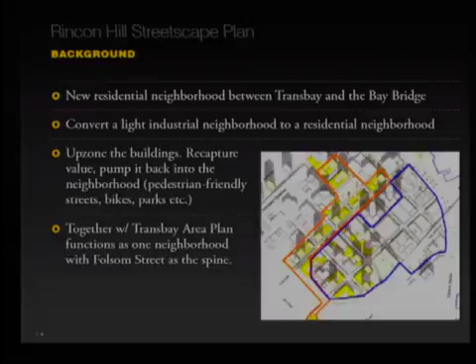These are the streets that are in Rincon. The red dashed lines are actually in the Transbay area. The colors are a little different on screen, but this purple line is Harrison Street. North, Market Street, is toward the top of the drawing. Folsom Street is going to be redone by the redevelopment agency, or by the Office of Community Infrastructure and Investment, the entity formerly known as the redevelopment agency.

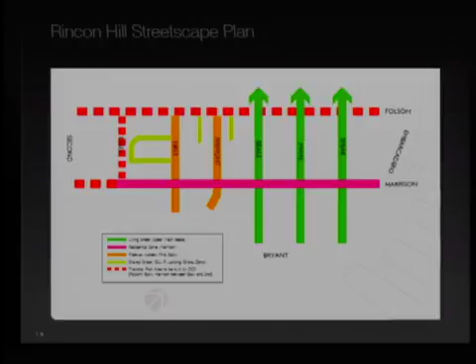The living streets, Main, Beale, and Spear, are those green streets. They have very generous sidewalks, and part of the intent is to show that they can double as open space. Fremont and First Streets access the freeway, so they're more a balance between pedestrians and automobile traffic.

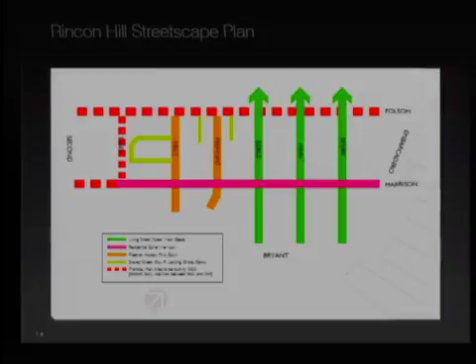Some of the alleys, the light green streets, are more residential and open space in character. So just to walk you briefly through, you can see Harrison Street's typical features in the plan, including these very generous bulb-outs. On the living streets, where you have a 30-foot sidewalk, those bulb-outs almost become like a pedestrian plaza.

Here's an example of some of the living streets, intended to function as open space because there wasn't a lot of open space in the neighborhood. These wide sidewalks enable us to create open space pods, generous little nooks programmed for activities like sitting and walking your dog.

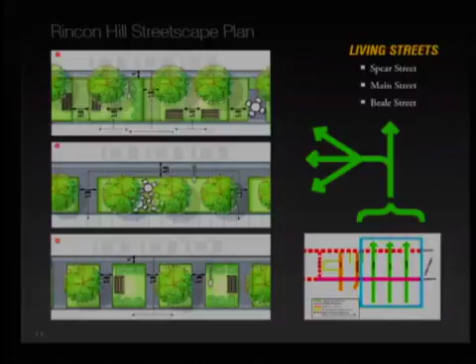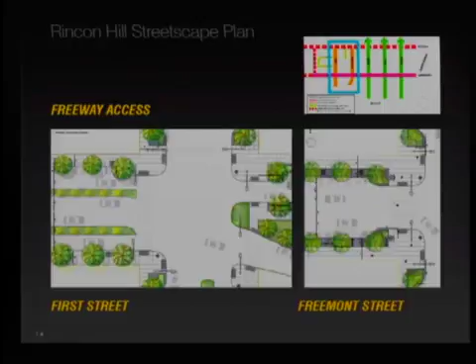The freeway access streets, Fremont and First Street, are similar to the Better Streets Plan standards, our basic standards for a walkable space, except the bulb-outs are more generous. Then Guy Place and Lansing Street are some of the residential alleys, with Lansing Street moving forward as a shared street.

Since the plan was initially adopted, there used to be a bus line on Harrison Street, which has sort of been removed. It was using the parking lane as a transit-only lane during the PM peak. So MTA has taken away that bus line, and we've added bulb outs to the north side. That's the tweak that the MTA board recently approved.

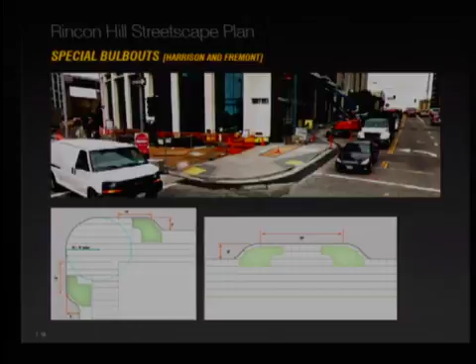The bulb outs themselves are bigger than the standard city bulb out, and they also have space for greenery, bike racks, or some street furniture. The plan gets into some details around planting materials, street furniture, and street trees that are called out specifically for different streets.

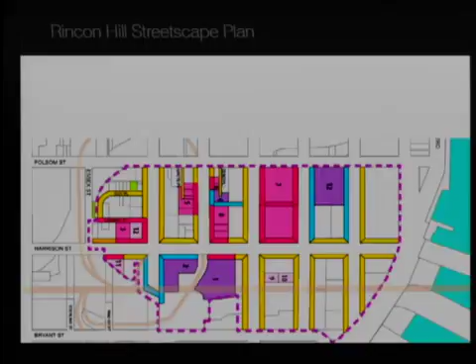So it's really important that we adopt this plan, because it gives us an important tool to work with developers to make sure we get the public realm that they're required to do.

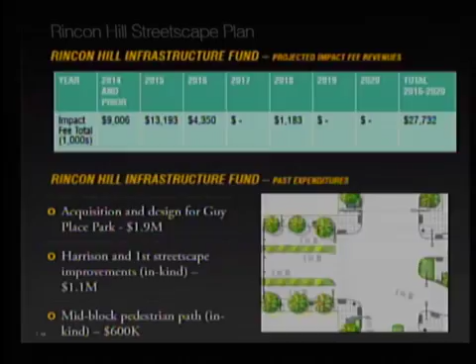And then just briefly, there are impact fees that fund a lot of this infrastructure, which goes through the IPIC process, done through the city's capital planning process. Annually, it's updated based on the projected revenues. So here's the funds that we have in the process right now.

Some of the past funded projects were Guy Place Park. We're going to be funding Harrison Street through this project, and a mid-block pedestrian pathway. Here's a photo of Guy Place Park, and some of the streets that have already been funded through the impact fees.

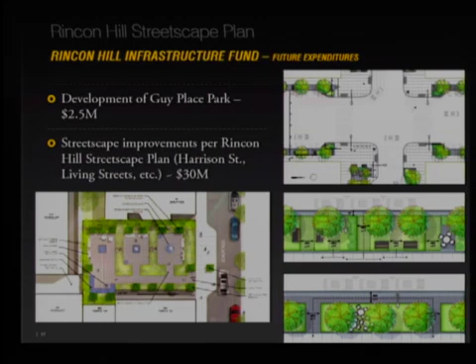Just a sneak peek, Folsom Street is not in the Rincon Hill plan area, but it is next door. And like I was saying, we work very closely, so I just want to give you a sneak peek of what's coming to Folsom Street.

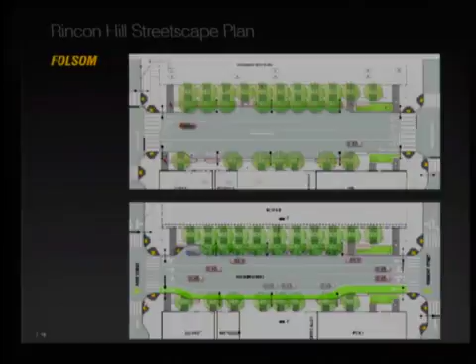Folsom Street was initially conceived as a 4-lane street, but because of Vision Zero and some of those goals, we've been able to convert it to a cycle track. So you can see initially it was going to become a 3-lane street with a cycle track, and now the new design calls for a 2-lane street and a cycle track, which is going to make a much safer pedestrian environment.

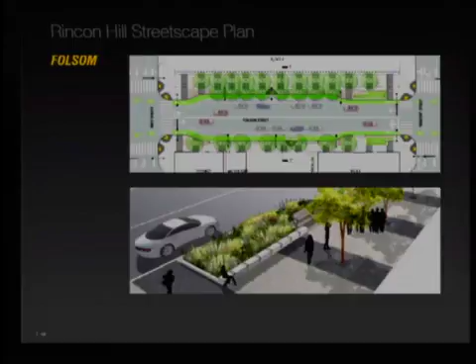It's going to be a really high-quality space, and we've been working closely with our colleagues at OCII to deliver that. And that is the summary of what's in the plan. So if you have any questions, I just want to thank you for your consideration of this.

Thank you. Supervisor Kim? Thank you for the presentation, and I would also love to get an electronic copy of it. I just had two questions.

One was on what you had brought up with the additional bulb outs on Harrison Street, which I'm very excited about with the rerouting of the 12 Folsom. This is a question I had reading the planning memo. I know that Folsom going eastbound currently turns and goes towards Chinatown. I guess I'm curious about the change from Harrison Street. I didn't understand what the exact change was. Oh yeah, can I get the computer back?

So to answer your first question about the bulbs: basically the city has impact fee money rolling in, and we've prioritized Harrison Street based on community feedback as the highest priority. Part of that is because, as you can see in the upper right, it touches all the streets in the neighborhood — it's an important circulation street. It's also a Vision Zero street, which we know is important. And then the other thing is, we're going to build Harrison Street and the bulb outs to the future dimensions.

For example, you can see an image here of Harrison and Spear, and you'll notice on the left side of the image there's a much wider sidewalk — the right side has a 15-foot sidewalk, the left side has like a 30-foot sidewalk. So when we build the bulb out, we'll build the curb line to the 30-foot sidewalk and then return it to what it is now.

And so in doing that, we can reduce the cost of these other streets a lot, but also really close up these intersections and make them much safer for pedestrians.

To answer your other question, the MTA used to run a bus on Harrison Street and Folsom. The bus ran as a couplet, one eastbound, one westbound. Because of the freeway, there was a PM peak transit-only lane. Afternoon traffic getting onto the Bay Bridge would slow down the bus, so the parking would disappear and there was a bus-only lane there. MTA then removed the bus during budget cuts.

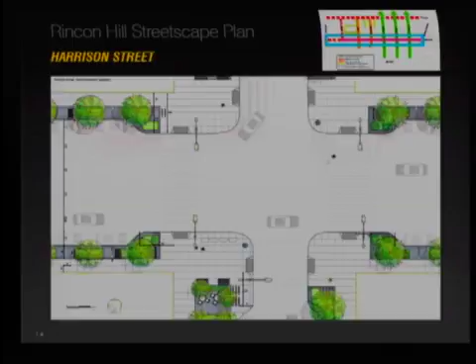They're now adding the bus back, and we've worked closely with them in designing this to make sure the bulbs don't interfere with future transit operations. Because there was a bus-only lane there, we couldn't have bulb-outs when the plan was originally written, since the bus would crash into the bulb-out. But now that the bus has been removed from that stretch of Harrison, we were able to add bulb-outs to the north side of the street over here.

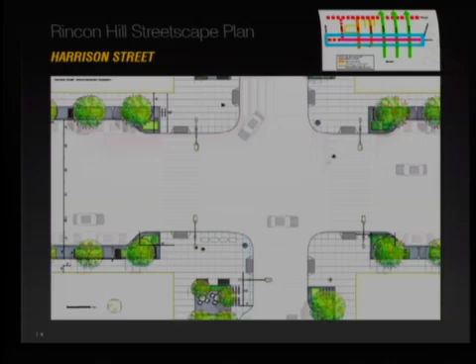And this is just east of 2nd Street, right? Yes. I only ask because our residents have a legitimate concern they've expressed to SFMTA, which is that none of the east-west buses in south of Market go past 2nd Street. They've been pushing MTA to push the buses further east to meet the needs of the Rincon Hill neighbors, since there aren't really any buses in that area.

So I'm curious whether the bulb-outs will get in the way of that future advocacy work. Maybe I should have articulated it better: MTA took away the bus during budget cuts, and the neighbors are understandably upset because there's no transit while we're adding all this dense housing. So we've worked with them on where the new bus is going to go, and they're putting a bus back. We've made sure the bulbs we're putting in here will work with the bus.

Part of the answer is that Folsom Street is becoming two-way, and it also has a lot of housing on it, especially affordable housing, which is a more transit-dependent community. It's also a flatter street, so it makes more sense for the bus to be two-way on Folsom Street.

Right, so if buses can go two-way on Folsom Street, which we're still working through in the Central SoMa plan to see if we can fit a two-way Folsom Street, since there are also conversations about it being a Howard and Folsom Street one-way diet as well, I think that would rectify or take care of that need.

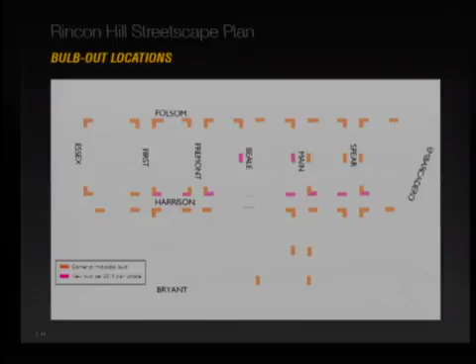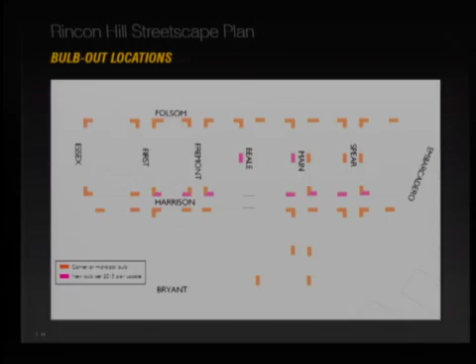I know the neighborhood would like to see that occur as soon as possible. I want to reiterate my support for utilizing the Infrastructure Financing District, which the Board of Supervisors approved back in 2011, to ensure we're able to use some of that tax increment to help fund gaps for the open space and streetscaping work this growing neighborhood really needs. My second question is a small one.

It was actually asked at the last community meeting at South Beach Harbor. There was a concern about placing trees between parking spots as a way of widening sidewalks on Guy Place. If I could get the laptop again, it might be helpful.

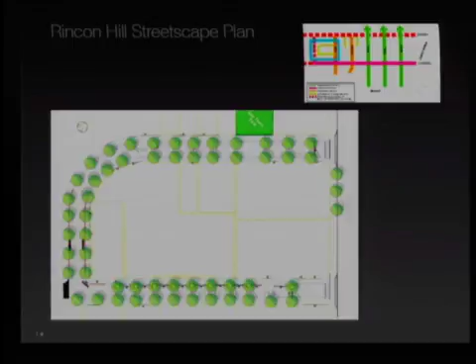The concern was that the city has never done this before. I believe we have, but I wanted to clarify that. The city has done this before — one example is Chenery Street in Glen Park, which has trees in the parking lane. This image is from the original plan, written before the Better Streets plan, so there was no shared street then. When we updated it, we added a shared street, but the original plan always called for trees in the parking lane; we just lifted up the curb when we updated it. There's precedent in Glen Park, and also in the Better Streets plan itself, adopted by the board around 2007, which has a whole typology calling for street trees in the parking lane as part of the city's toolkit for designing streets.

On an aesthetic level, I really like it. The concern raised was that the trees would get hit a lot, and how we would protect them with cars parking in between. The second concern, which I don't have the answer to, was whether the roots would come up above the sidewalk and impact the parking. So let me try to take a stab at those two.

Between the cars, you can see this bar — that's a wheel stop. And on the other side, there's a little square thing, which is a bollard that protects the trees. The parking spaces are also a little more generous than a normal parking space, so cars can get in and out.

The final important thing about Lansing Street is that when the 45 Lansing project, on this parcel off the bottom of the map, went through the Planning Commission, because it's a big skyscraper on a postage stamp parcel, they couldn't meet their open space requirements. So the Planning Commission required them, in their conditions of approval, to build Lansing Street and maintain it in perpetuity. So if a car bumps into a tree and hurts it, or roots break up the sidewalk, the 45 Lansing development is responsible for maintenance — removing that responsibility from the other property owners on Lansing Street, who they're assuming it from in perpetuity.

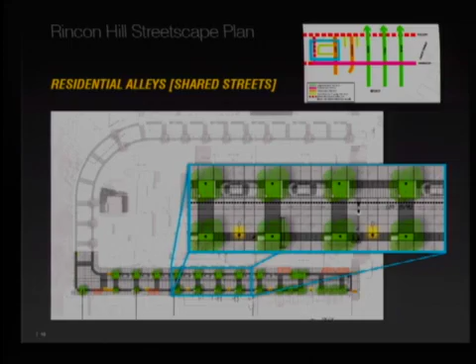Thank you. I'd like to now go to public comment. Public comment is open at this time. If there's any member of the public that'd like to speak on this item, please come forward. Seeing none, public comment is closed.

Supervisor Kim, do you have any last remarks? Yeah, I just want to thank the planning department for all of their work on this. This is a neighborhood that will support 10,000 residents, so it's really important that we create a complete neighborhood. We can't wait soon enough for these improvements to go in, both for open space and the streetscaping, so that we can encourage our residents to walk safely and build this healthy neighborhood that we want to see. So thank you for that.

I know that there were a lot of delays along the plan, partially due to the recession over the last couple of years, but it is really amazing to see all the development and construction occurring in this neighborhood now. Very painful for the existing residents, but in the long term, I really hope that we're able to build this great neighborhood. So I ask for your support, and I'll make a motion to move forward item number 1 and number 2 with positive recommendation.

Motion made by Supervisor Kim. Could we do a roll call vote? Thank you.

A roll call vote on item number 1: Supervisor Kim, aye. Supervisor Wiener is absent. Supervisor Cohen, aye. You have 2 ayes. This motion passes with positive recommendation.

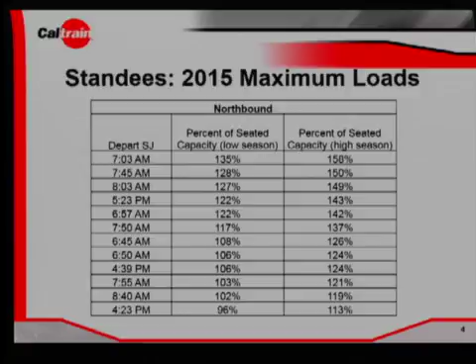You can see that we have a variety of different customers riding the system, from people bringing on bikes, to people going to and from work, and our ADA passengers. For the average rider, they are on the Caltrain system between 20 and 28 miles, and for between 30 and 50 minutes. As you can see, when this compares to other systems in the Bay Area — BART, Muni, and VTA — their passengers are on those systems for less time than they are for Caltrain.

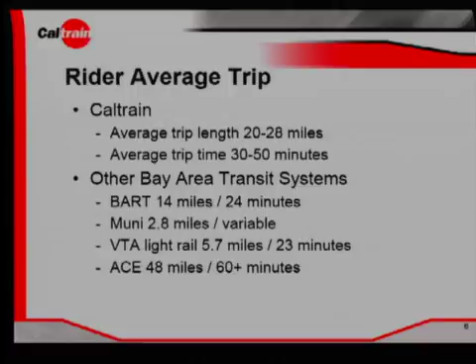For ACE, a commuter rail system, you can see they're even more. So Caltrain right now is a little bit in the middle for what riders are experiencing and how long they're on the system. But when we look at the future for electrification, we have to keep in mind: will the system look a little bit more like BART, Muni, and VTA, or is it going to look more like ACE and Capitol Corridor and other commuter rails? So we have to balance that and understand the needs of our riders using our system.

Our riders have told us a lot about their capacity wants and desires, and that Caltrain needs to expand to be able to use the system efficiently. But we've also heard from businesses as well. The corridor that Caltrain runs on, between San Francisco and San Jose, has an incredible amount of economic support and vitality to the state: 14% of California's GDP, 52% of the patents, and 25% of California state revenue come from this corridor.

And because this corridor is so important for so many businesses, they created the Caltrain Commuter Coalition, which was formed last year.

The point of this coalition is really to advocate for Caltrain modernizing quicker, increasing that capacity, and working on the whole 101 corridor to see what can be done to alleviate congestion.

That will make this a viable and sustainable economic environment. You can see a couple unique facts about Caltrain riders: 75% of the riders use the system to commute to work, and 60% are choice riders, meaning they have access to a car but are choosing to ride Caltrain instead of clogging 101 and other arteries, using it as a good alternative to get to and from work.

So what Caltrain's been doing to address their needs is, first of all, do everything we can do now. The first step was we bought used diesel trains—you can see in the bottom left-hand corner a picture of those trains. We put them out in our system without even painting them because we knew we needed to get them out there quickly. Those are in operation now, helping to alleviate some of the congestion that's on there today.

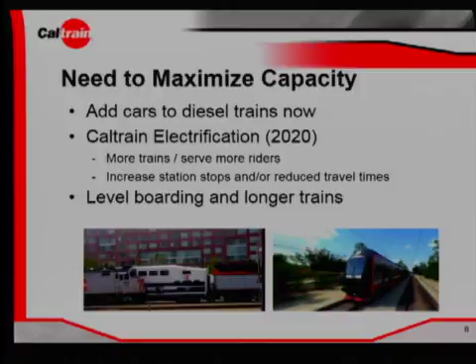Now, when we talk about electrification—and I can cover this on this slide and in a couple slides further, I'll get into more details on those elements—with electrification we will be able to add more trains per hour per direction. So not only will they be 6-car trains, but we only have 5 in the peak hour today; with electrification we'll be able to have 6. So for standees, seats, and bikes, that will increase dramatically on the system. The exact ratio of seats to standees to bikes—we have a whole presentation on the staff recommendation for those elements, and I can talk about those a bit, but in broad terms, those are the key elements of how you get more capacity with electrification.

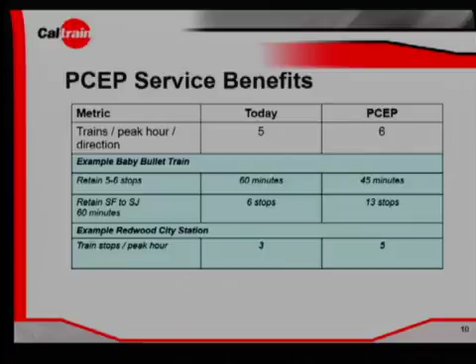So if you're standing at a station like Redwood City and you get 3 trains coming through today, with the electrified system, you could have 5. That'll mean a lot to you—you'll have more choices and be able to get on and off the system quicker. So it's not just one more train per hour, but it really is the performance difference that lets us change the schedule and make different schedules for people, hopefully making it more convenient.

With this, I'll run through a couple slides on where we've been with the details of the electrification project, and then I'll turn it over to Dave to talk about how our thought process has been modified based on stakeholder feedback, and finish with what our staff recommendations are going forward.

So the first one is just a recap of where we are. We spent 2 years working on the environmental process for this project, and we got board certification at the beginning of 2015. We've issued a design-build RFP contract, which is the contract for people building the poles and wires to electrify the system, and we expect the board to award it in the fall of this year. On the EMU side—the electric trains—we want the Caltrain board to issue an RFP in July, next month, so we're able to have a contract award by the end of this year and keep in place the time frame of having electrified service by 2020.

These are really important milestones to meet in order for us to get that 2020 date, which is so important to our riders, business communities, and our board members.

It's important for us to talk about our original plan because we want to be very transparent about what we were doing and where we're now modifying. We've been getting a lot of stakeholder feedback as we've gone around to public meetings over the last couple of months, and we'll continue to do it this month to make sure we are on the right path, and if we're not, that we're hearing from our stakeholders.

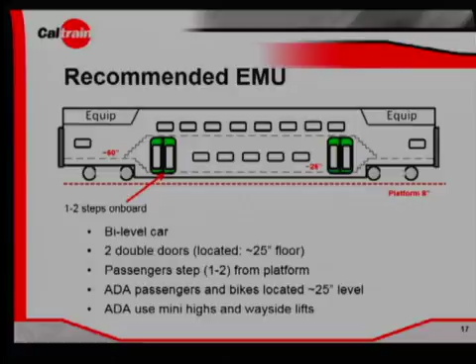And this is what the vehicle would look like. It would serve our corridor today. It would be bi-level, with several different internal levels, and the doors are at that roughly 25-inch level height. If you're an ADA passenger or carrying a bike on board, you take those couple steps in, and then you'd be at that bottom level.

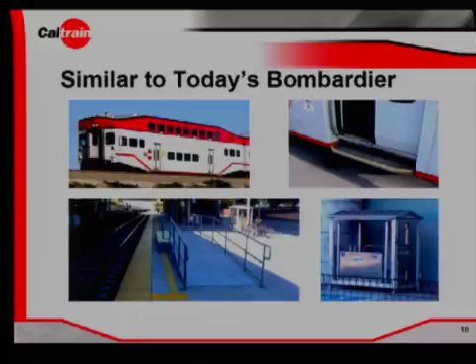Now, as I've mentioned, future level boarding is very important to Caltrain. It's important for safety, operational efficiencies, passenger convenience, and ADA elements. This is something we do want in the future, and depending on which car we get, that future level boarding height will need to meet that.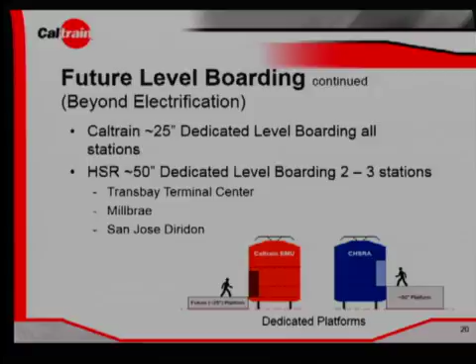So in our original thinking, for level boarding, Caltrain would have level boarding at the 25-inch level, and high-speed rail would also have level boarding, but at the 50-inch level. So we'd both have level boarding, and at the 2 to 3 stations shared by high-speed rail, there'd be dedicated platforms.

Now, with any level boarding height, there are challenges. There's a lengthy construction period—when you're having revenue service, you're going to have to build those platforms, and Caltrain has 27 of them. There's also a California waiver that would be needed because we have freight on the corridor. We also have several different tenants that board the corridor at different heights—ACE, Capitol Corridor, and Amtrak all have different heights than Caltrain today, potentially Caltrain in the future, and high-speed rail.

For station area impacts, we have 7 historic stations. There are different ramps and very different site-specific needs that all have to be taken into consideration for any level boarding height.

So with that, I'll turn it over to Dave to walk through our thought process of how that's been modified for our thinking, and then I'll come back for the staff recommendation going forward.

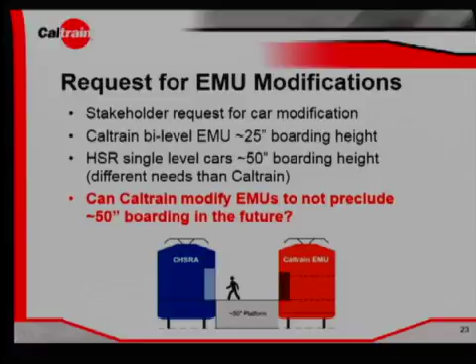As we've gone forward in conversations with each of the car builders, we're trying to take into account what the requests have been from many of the stakeholders. As Casey said a few minutes ago, the original process was for Caltrain to have a 25-inch boarding height and high-speed rail to have 50-inch. So what was put in front of us was: what could we do to get to that common boarding height of 50 inches? How could we modify the EMUs we're about to purchase so that we could do that and have level boarding in the future?

We started a 6-month process in conjunction with high-speed rail, and Ben Tripousis sends his apologies today—he's in Sacramento and couldn't be here—but I want to assure you we've been through this lockstep with high-speed rail. We interviewed car builders to find out what they had and what their capabilities were. We did a technical analysis to make sure there weren't any critical flaws in anything we were looking at. And then on the back end, we also went through to find out what the constraints or issues would be on the operational side, because this is going to have a long-term effect over a 30-year plus time frame for each vehicle.

The car builders that participated—there were 7 of them—proposed different options. One was to add additional doors at the upper and lower level, and the other was to use something called traps, which would not result in a loss of seats but would limit the number of doors available for passengers to board and exit the vehicles. What is a trap?

I'm sorry. A trap is... Got one more picture?

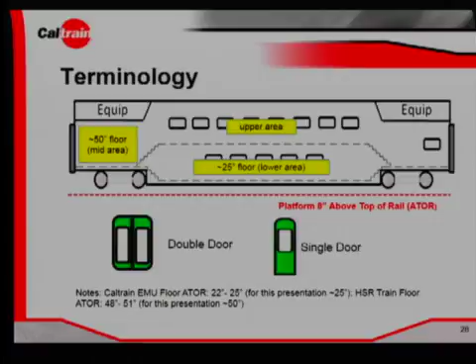On the lower left is a double door, similar to what you saw earlier in the Bombardier fleet. On the lower right is the single door, and that's going to be associated with the traps when I get to that piece.

As we look at the 2020 timeframe, it's going to be a time when we have mixed fleets. We'll have the EMUs running, but we'll still only replace 75% of the vehicles under this program, so we will continue to use the diesel fleet out into the future.

If I look specifically at modification A, this was the first one that put 2 sets of doors - 2 doors at the lower level, which was the original way we had envisioned and planned for the vehicles, and then 2 at the upper level. What would occur is those 2 upper level doors would be installed at the time the vehicle was manufactured. They would then be closed and not utilized until the platforms were at the 50-inch level.

That would occur once the first platform went to 50 inches, because at that point there would no longer be access from those lower level doors. This gives us better ease of being able to get passengers and bikes on and off. We have to figure out where the ADA facilities are, whether on the upper or lower level, and that will make a difference as we move forward into the upper level platforms.

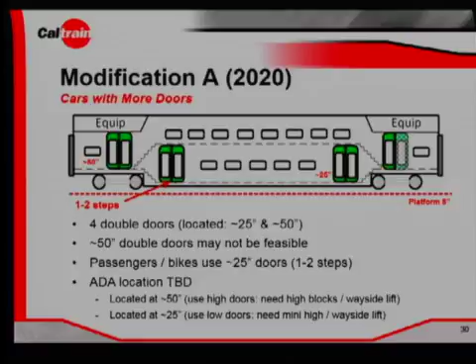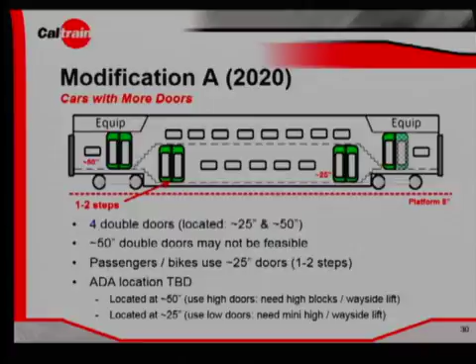To access those, we would use a combination. If it's the 25-inch platform, the mini-highs we currently have at the stations could be used, or the lifts. If we went to the 50-inch level before all the platforms were at that height, we would heighten those blocks, which we now call maxi highs, and also use the wayside lifts.

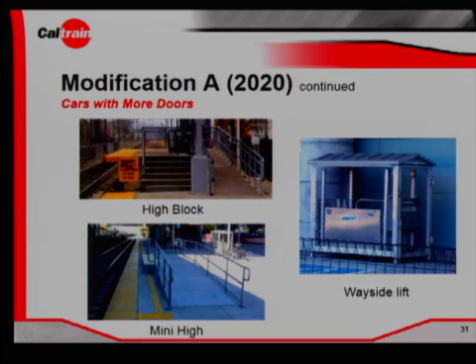This gives you an idea of what each one looks like. On the top left is a picture from the East Coast, a high block that gives you boarding height at the 50-inch level. The lower left shows the existing mini-high blocks currently out on the system. In some cases, if we went to those higher blocks because of platform constraints, we may be forced to remove some mini-highs and use what's on the right, the lifts. We have those at some stations now, and depending on configuration, we may have to use them at more.

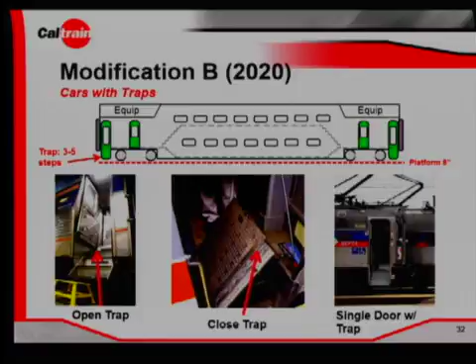In modification B, which takes us to the point of going with the traps, this is really a description of what I showed on the previous slide. It involves single doors, with traps and steps. This is maintenance intensive — some manufacturers have automatic traps, some have manual traps. The ADA location at this point would be at the 50-inch level, and then you have a series of steps going up and then down again to reach the lower level, where the bicycle parking area would be.

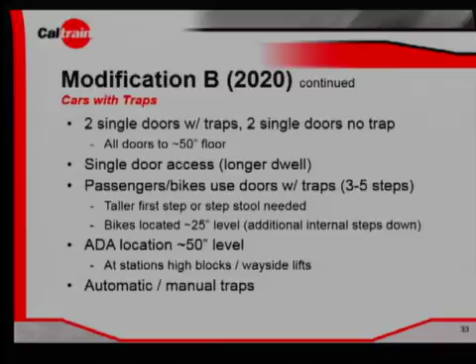By having single doors instead of double doors, it also causes an increase in dwell time. I don't have an exact number for what that would be — it's basically about half of the door leaves we currently have. I wouldn't say it's a doubling of the dwell time, but it is an increase.

When we look to the future at what blended service would be with high-speed rail, with modifications to the stations — in this case scenario 1 — we have 2 to 3 stations with that common platform height, the 50-inch for high-speed rail and Caltrain, and on the right, the 25-inch high platform only at the Caltrain stations. So this scenario does not have all platforms raised to the 50-inch height.

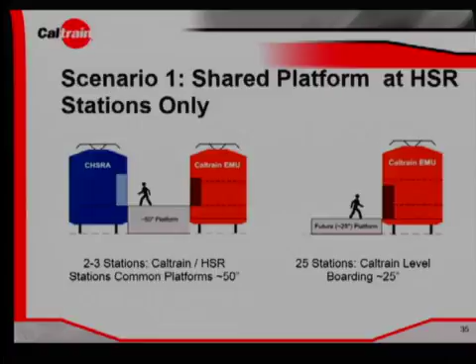If you go to scenario 2, this is with common height 50-inch platforms for both high-speed rail and Caltrain at all of the stations on the peninsula.

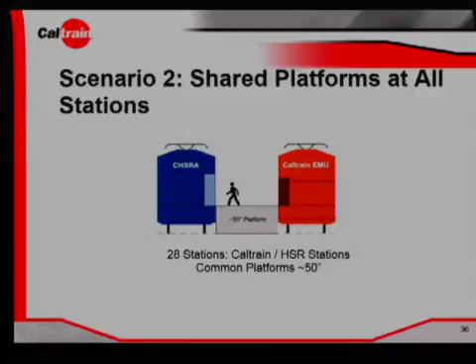Moving to the future, what that means for modification A is you can see that if we stay with 2 or 3 of the stations at the higher platform level, both the upper and lower doors would have to remain open to serve both the 25-inch height and the 50-inch height platforms. In scenario 2, shown at the bottom, if all platforms were at the 50-inch height with common boarding, we would be able to close those 2 lower doors, basically regaining seats.

I have a couple questions for you, Luis, and I'm not sure if I should direct it towards you or towards Casey. I wanted to know if Caltrain had the money for level boarding at any height. No, there is currently nothing in the budget right now for any platform modifications, and there is nothing that was cleared in the environmental process for any changes to the platforms.

As Casey said a few minutes ago, there are also a series of historic stations on the peninsula that could be challenging when it comes to making those platform changes.

I also wanted to know if the disability community was consulted on some of these plans, and with regards to the platform, if they have a preference or a comfort level when it comes to getting onto these trains.

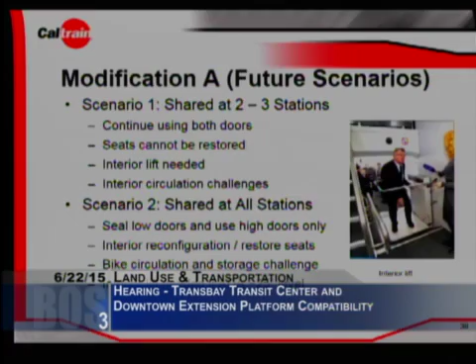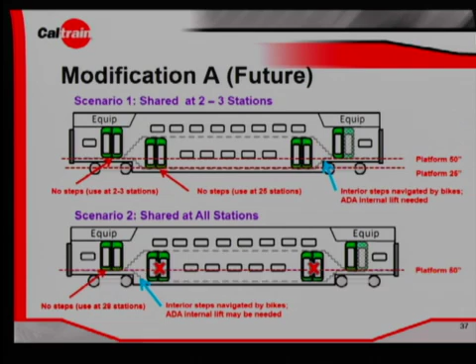So that would allow, in modification, staying with this for just a second, what this does with all platforms shared is you close the lower doors, which regains the seats. That shows you what that modification in scenario 1 does, and it's basically what I described in the previous slide.

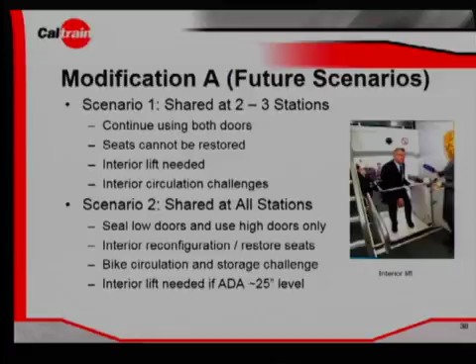Modification B goes back to the vehicles with the traps. At the point in time that you only had 2 or 3 stations that were at the upper level, you would continue to use the traps at the point that you could get access from either the 25-inch or the 50-inch platform.

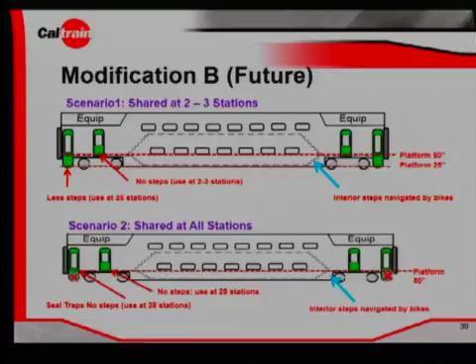So you would have both of those sets of doors with the trap still active. If you went to the second scenario, which was shared boarding at the 50-inch level with the high-speed rail locations, then you would close off the bottom of those traps, seal the doors, so that you would have 2 single-leaf doors at each end of the car for entrance and exit for any of the customers.

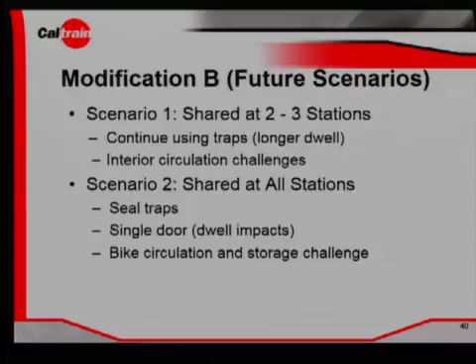That's a descriptor of what would occur as you went through that process to seal the traps, and some of the pieces in terms of what the impacts are on dwell time, and challenges for passenger and bike circulation. Each one of these scenarios has its own pluses and minuses.

Potential path forward, I'll let Casey come back up unless you have any other questions at this point. We have no questions at this time. Thank you.

I'll go through the next couple slides on a potential path forward, and then we have been meeting with lots of groups, including ADA groups, so I'm happy to talk about some of that feedback we received.

So for the potential path forward, we have to keep in mind the framework, which is making this all a little bit more complicated than I think anyone wants. But the blended system is not yet defined. There needs to be more community planning, more environmental evaluation to figure out exactly what it will look and feel like in the future. Right now, we have a conceptual idea of what the blended system is.

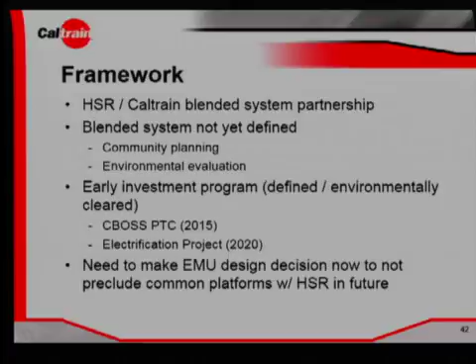But what we do have defined is the Early Investment Program, actually called the High-Speed Rail Early Investment Program. That's the CBOSS PTC system, or Advanced Signal System, and the electrification project. That is environmentally cleared, and we do have it defined. What we have been asked to do is make a decision on our EMUs, our electric trains, so that it will not preclude a future common platform with high-speed rail. So we are trying not to preclude a future that's not quite defined.

So what staff is recommending is that we choose the car with more doors as the option. There are some challenges with that option. There is a seat loss when you have both sets of doors open, and some passenger circulation issues inside.

As you saw, if you're a bike passenger or a passenger bringing a bike on board, you would board but then need to transition down steps internally. So there's some challenges there, but we think there's some short-term solutions that we can implement.

First, we would ask the car builders to design this car with 2 sets of doors. We would keep the high doors sealed and only use the low doors initially. It would be similar to what the EMUs would originally look and feel like we'd proposed, but we'd have that flexibility later to open them when we have further definition on the blended system.

And we look at whether it makes sense to have some car interior reconfigurations. At this point, we are asking High Speed Rail to fund those modifications so that we make sure we have this option in place to meet the blended system's different possible futures.

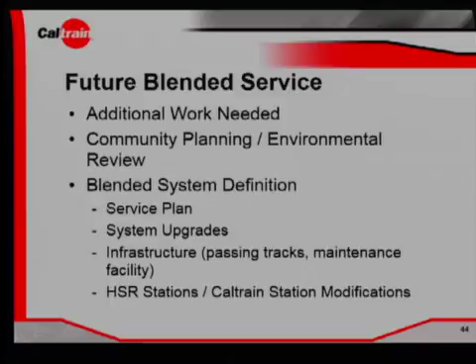When you think about the blended system and what needs further definition, it's the service plan, system upgrades, passing tracks, maintenance facilities, what each of those stations look like. We have plans from when the full build was proposed several years ago, but we don't have that detail of planning today. So there's more work that's needed, and we don't need to make all of our decisions today. We need to keep the future open so we're not precluding some different options.

So with our next steps, as I said, we've had many public meetings over the last couple months. We released a draft RFP to the car builders to confirm some of the information we heard from them when we had these internal conversations. We asked them a variety of questions, and we'll get those answers back later this month and be able to provide that information to our board.

We are going around to different groups with this proposed path forward and getting feedback on that. We have a separate presentation that deals with the internal configuration, the balance between seats, standees, bikes, and bathrooms. We're happy to give that long presentation to this group as well if you want more information.

But for this topic, we know this was of great interest to this board, and so we wanted to come back to it. Our plan is to release an RFP in July to keep those milestones for the 2020 date. We'll need to update our regional funding plan before we're able to go out with contracts, especially on the design build portion of that. With that, we're happy to take any questions.

Thank you, Casey. Thank you. Supervisor Kim, do you have any questions? I don't have questions. I was just going to make a few comments.

It's really great to see the progress that has been made over the last 6 months. I know that this was a complex engineering issue, and it's nice to see that there is a solution moving forward. I think we will still continue to explore it. I think the lift and the ADA issue is probably what seems most prominent to me with the bi-level boarding, and being that at 50 inches, those that need wheelchairs or are unable to use the stairs are going to have a more difficult time accessing the seats on either level. That's probably one of the big issues that I see. But it's great to see some design engineering solutions to see how we can really take into account the needs of multiple systems on this one rail.

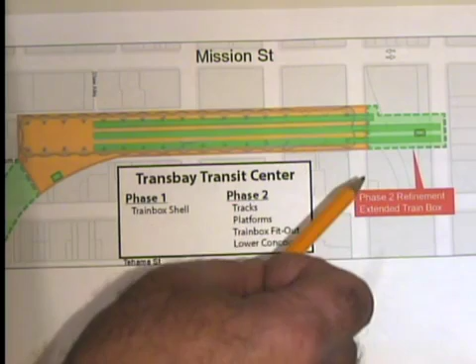You have two issues with the Transbay Terminal as designed right now that both have to do with the second street alignment. The first is that it's impossible to have tail tracks. There is no room because you're pushing the tracks all the way out to the other side. And the second is, with the short Caltrain tracks, you will never be able to vacate the 4th and King storage.

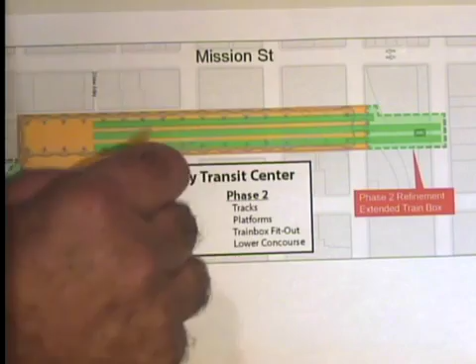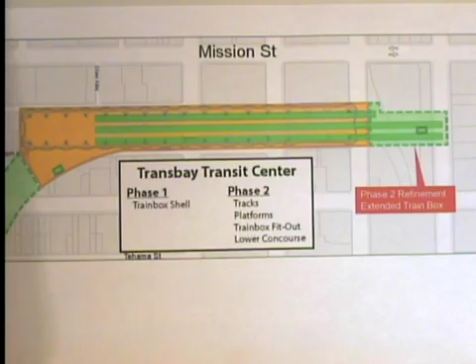The point with the tail tracks is, Supervisor Wiener, you brought it up at programming allocations on May the 13th. We need to be able to connect the other end of the Transbay Terminal to the East Bay, and it'll be impossible to do with the second street alignment. Thank you very much.

Is there anyone who would like to speak on this item?

First and foremost, if you allow us to print out cards, then our name should be read. I'm going to protest this, because there must be a system. It's like yesterday, to bring up another point, somebody proposes something but then conveniently leaves the chair and goes out. So having said that, there are people here selling snake oil.

We watch the Transbay Joint Powers, and we see that these so-called experts, as the young lady said, it's just conceptual plans. So we can listen to the conceptual plans. My thing is, I've studied the trains in Europe, predominantly in France and in Germany. I would say we need experts from Japan, China, Germany and France and some other countries to come and really review these presentations, Mickey Mouse presentations.

So this is a despicable committee. You better get your act together. If you allow us to fill out our cards, you better state our names, because the chair of this committee needs a lot of training. I know that. She says, oh, she's on some other committee. We don't want to hear about that. What San Franciscans want to hear is a hearing on this, the platforms, how some of the speakers have spoken, so that the constituents of San Francisco have a real say. And there must be a change of this committee, a very despicable committee. Thank you very much.